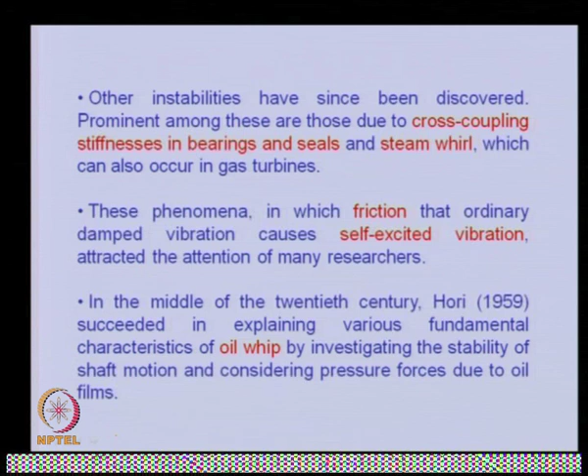The mechanism of vibrations due to steam whirl in turbines was explained by Thomas in 1958, and that in compressors was explained by Alford in 1965.

The vibration of a hollow rotor containing fluid is a relatively new phenomenon of flow induced vibration. Instability due to liquids partially filling the interior cavity of rotors was demonstrated by Kollmann in 1962, and in 1967 Ehrich reported that fluid trapped in an engine shaft introduced an asynchronous vibration and also changed the shape of resonance curves.

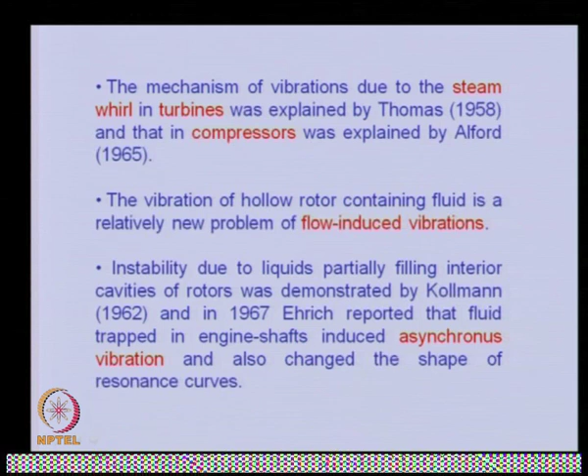Kuipers in 1964 and Wolf in 1968 independently succeeded in explaining the appearance of an unstable speed range in a post critical region of a rotor system containing inviscid fluid.

In the 1980s, the rotor dynamics effects of seals in fluid handling machines received a great deal of attention. Rotor destabilization due to seals was predicted and demonstrated in an operational compressor by Jenny in 1980.

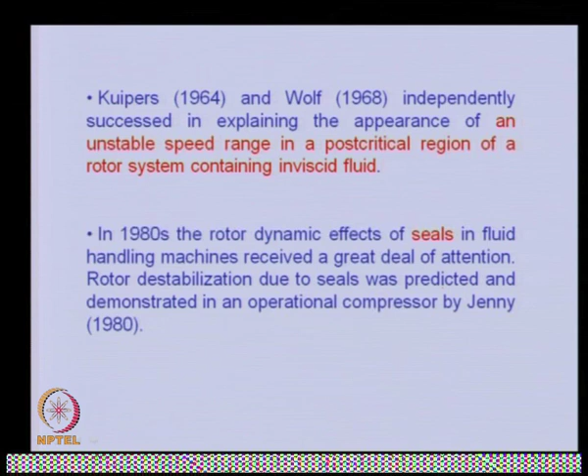As rotors became lighter and rotational speeds higher, the occurrence of nonlinear resonance such as subharmonics of half x, one-third x, etc., became a serious problem.

Yamamoto in 1955 and 1957 studied various kinds of nonlinear resonances after he reported on subharmonic resonance due to ball bearings in 1955. He also investigated combination resonances.

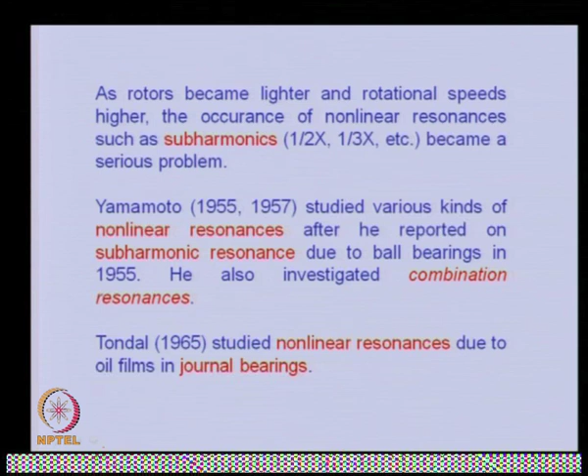Tondal in 1965 studied nonlinear resonances due to oil films in journal bearings. Ehrich in 1966 reported subharmonic resonances observed in an aircraft gas turbine due to strong nonlinearity produced by the radial clearance of squeeze film dampers.

These squeeze film dampers are identical to general bearings. The only difference is that in a squeeze film damper, the stiffness property which a general bearing gives to the rotor is not there; only the damping is produced to the rotor.

Then Ehrich in 1988 and 1992 reported the occurrence of various types of subharmonic resonances up to very high order, and chaotic vibrations in practical engines.

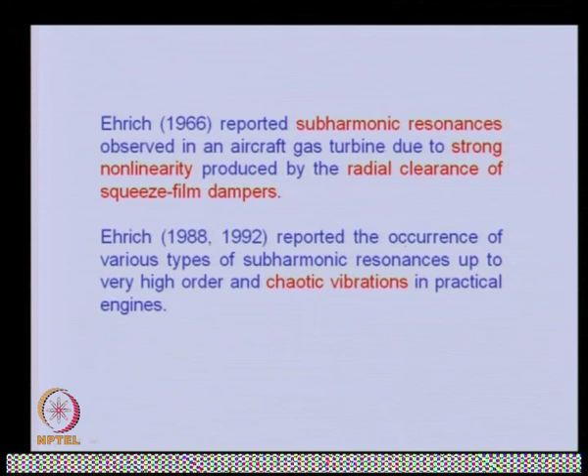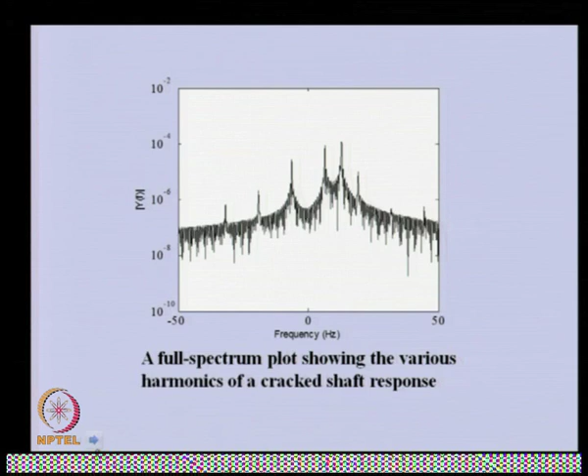The non-stationary phenomena during passage through critical speeds have been studied since Lewis in 1932 reported his investigation on the Jeffcott rotor.

Non-stationary phenomena that occur are of two types: one in a process with constant acceleration, and another with variable acceleration, in which we have limited driving torque. The theoretical analysis of such transitional problems is far more difficult than stationary oscillations. Many researchers have adopted numerical integration.

When considering transient rotor analysis, you must have observed that to avoid the critical speeds, generally the rotors are given very high acceleration so that they can cross the critical speed quickly and go to the supercritical region.

During acceleration, a problem may arise depending on the driving motor's power. If the drive has sufficient power, there will not be any problem achieving whatever acceleration we want. But if the drive has less power, the required acceleration will not be achieved, and you will have the problem that variable acceleration may take place.

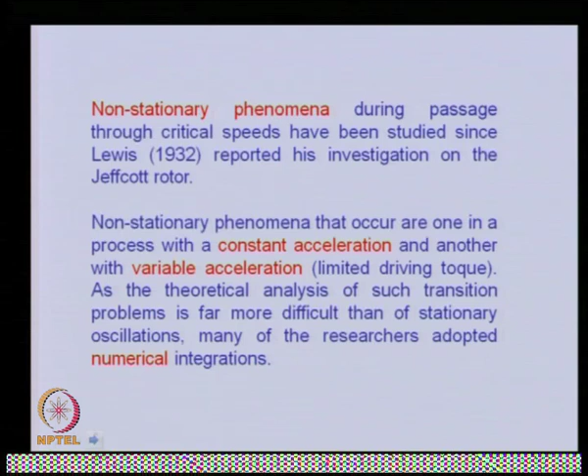Natanzon in 1952 studied shaft vibration at critical speed. Grobov in 1953 and 55 investigated in general form the shaft vibrations resulting from varying rotational speeds. The development of asymptotic method, that is analytical method, by Mitropolsky in 1965 considerably boosted the research on this subject.

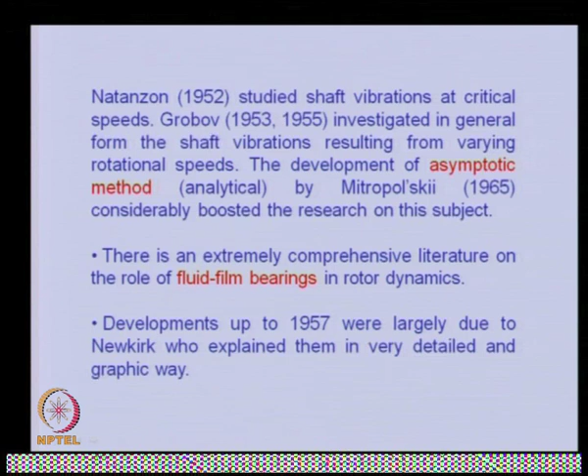There is an extremely comprehensive literature on the role of fluid film bearing in rotor dynamics. Development up to 1957 were largely due to Newkirk, who explained them in a very detailed and graphical way. Then beginning in the early 1960s, most attention focused on hydrodynamic bearings.

This was largely stimulated by Lund and Sternlicht and the Lund's work in 1962 and 64. Gunter's work in 1966 related to rotor dynamic stability problems, combined with Ruhl and Booker's 1972 and Lund's 1974 methods for calculating damped critical speed, stimulated a great deal of interest in rotor bearing stability problems.

Lund in 1987 gave an overview of fluid film bearing.

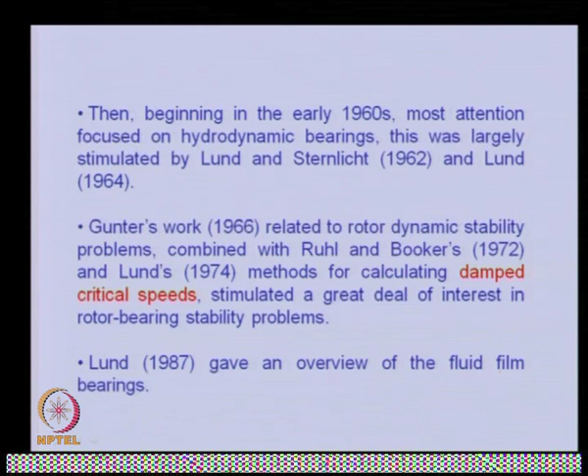In the mid 1970s, the rotor dynamic instability experiences with various high pressure compressors and high pressure fuel turbopumps of the space shuttle main engine focused a great deal of attention on the influence of fluid structure interaction forces, particularly forces due to liquid and gas seals, impellers and turbine.

Someya in 1989 and Tiwari in 2004 compiled extensive numerical and experimental results and literature of dynamic parameters of fluid film bearings respectively.

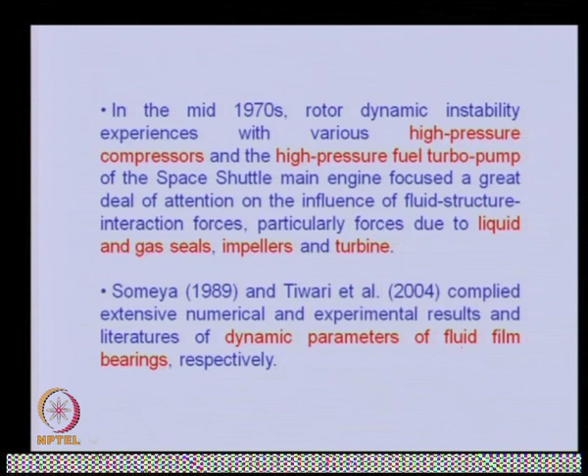Shaft seals have similar effect as fluid film bearings. They influence the critical speeds, can provide damping, or on the other hand cause instability. Some of the first investigations were carried out in 1965 by Lomakin. Since then, shaft seals have acquired a significant role in their effect on rotor dynamics.

As the extensive literature shows, in Childs' book in 1993 and a review paper by Tiwari in 2005.

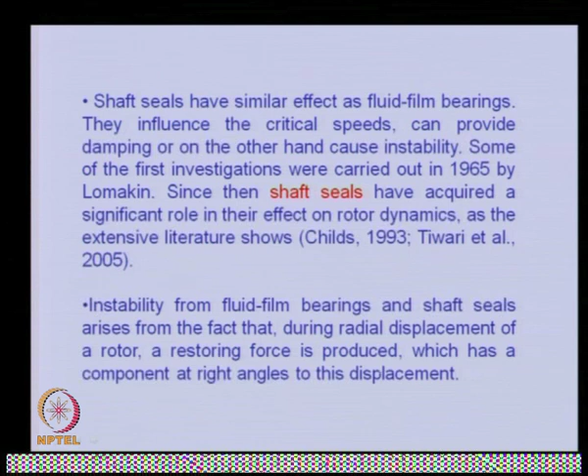Instability from fluid film bearings and shaft seals arises from the fact that during radial displacement of a rotor, a restoring force is produced which has a component at right angle to the displacement. Such a mechanism is possible for a rotor with blades as a result of variable leakage around the blade tips. The phenomena of instability was described in detail by Newkirk in 1924, whose interest was in turbomachinery.

At first, it was thought that the cause was internal friction due to shrink fits of the shaft, and the theory was developed to explain this, together with experimental verification by Newkirk in 1924 and Kimball in 1924 and 1925.

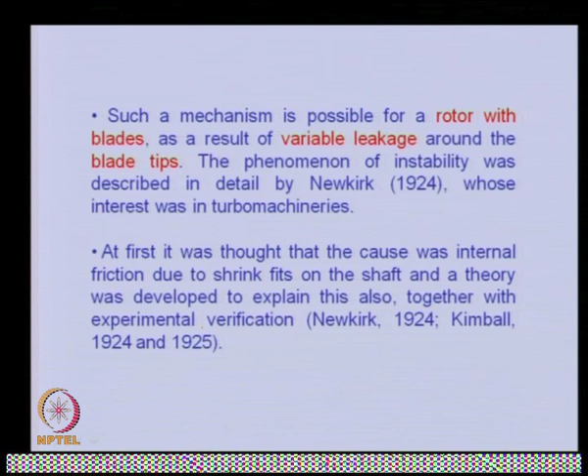Till now we have seen various literature reviews related to rotor dynamics phenomena and how people have attempted those phenomena. Now let us try to summarize whatever we have studied in a tabular form. So this is a summary of various rotor dynamics phenomena and their details.

Like whirling, that is related with unbalance, was first. This particular term was used by Rankine in 1869, and this was theoretical work which described the general motion of the rotor system.

Self-centering of rotor, this concept was introduced by De Laval in 1883. This is a theoretical experimental work which gives the unbalanced response of rotor.

Then the synchronous whirling was introduced by Föppl in 1895. That is also an unbalanced response with theoretical response.

Critical speed concept was introduced by Dunkerley in 1895. This is a resonance phenomena. Second critical speed was observed by Kerr in 1916 in his experimental setup.

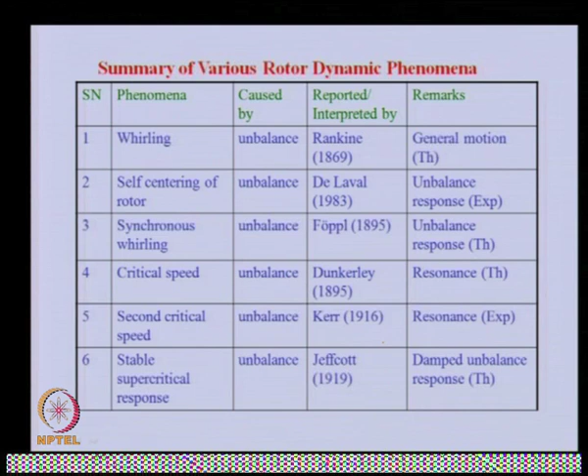Then secondary resonance due to gravity was explained by Stodola in 1924, instability due to shaft asymmetry by Prandtl in 1918, gyroscopic effect, that is rotor wobbling, was described in the Stodola's book in 1924.

Threshold speed, spin speed for instability due to internal damping, was described by Newkirk, Kimball and others. Threshold speed for instability for dissimilarity of bearing stiffness was described by Smith in 1933.

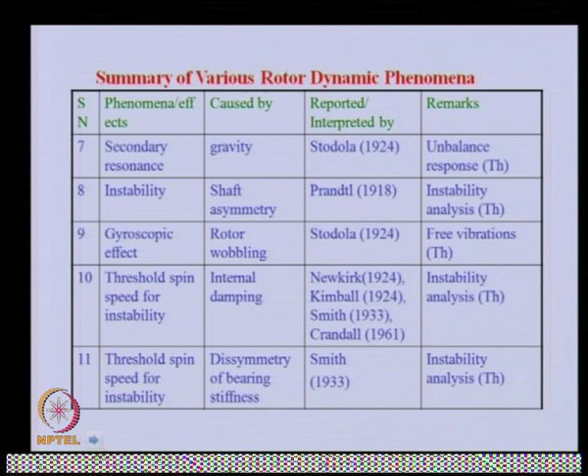Oil whip was observed by Newkirk and Taylor in 1925. Self-excited vibration due to contact was first reported by Becker. Oil whirl in hydrodynamic bearing was described in more detail by Hori in 1959. Steam whirl was reported in steam turbine by Thomas in 1958.

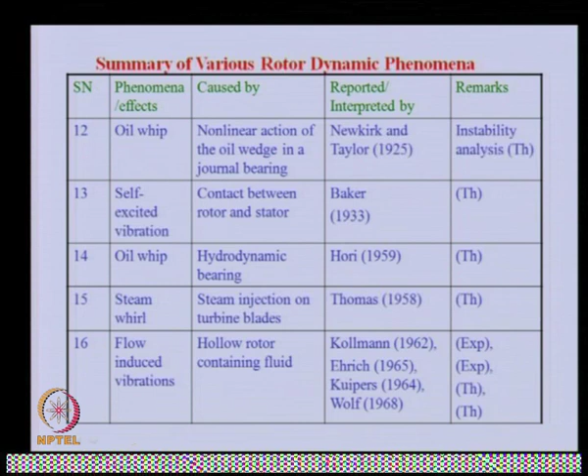Flow induced vibration in hollow rotor containing fluid was described by Kollmann and others, both theoretical and experimental works. Instability due to seals was reported by Jenny in 1980.

Subharmonics and combination resonances due to nonlinearity in the ball bearing was reported by Yamamoto in 1955 and 57. Nonlinear resonance due to oil film in journal bearings was described in great detail by Tondl in 1965. Subharmonic resonances due to squeeze film damper was reported by Ehrich in 1966.

Non-stationary response due to constant and variable acceleration of rotor speed was described by Lewis in 1932. Shaft vibrations at critical speed, that is varying spin speed, was dealt with by Natanzon in 1952.

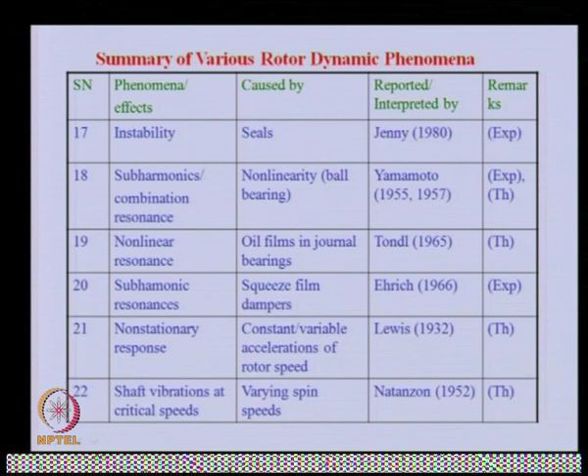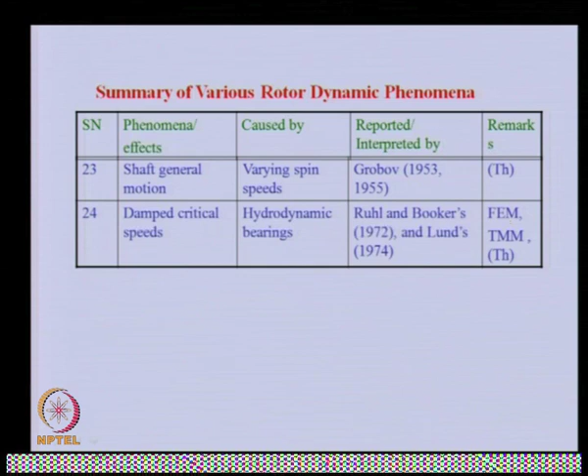Then the shaft general motion, that is for varying spin speed, was described by Grobov in 1953 and 55. This was theoretical work. The damped critical speed of hydrodynamic bearing was explained by Ruhl, Booker and Lund's work in 1974. They used FEM and TMM, that is finite element method and transfer matrix method respectively.

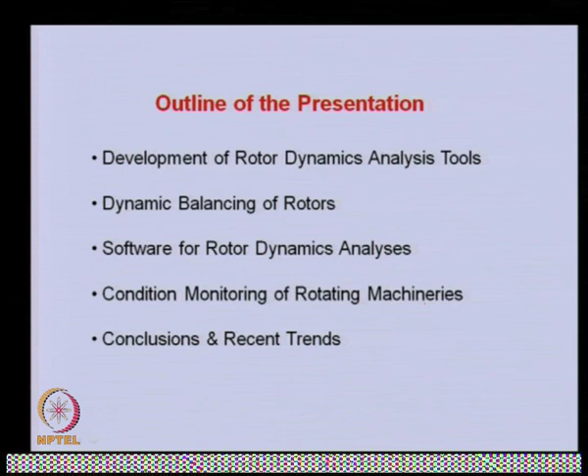Now we will begin with another phase of the presentation. This is the outline: development of rotor dynamics analysis tools, dynamic balancing of rotors and how that development took place, software for rotor dynamics analysis, condition monitoring of rotating machinery, and finally the conclusion and recent trends.

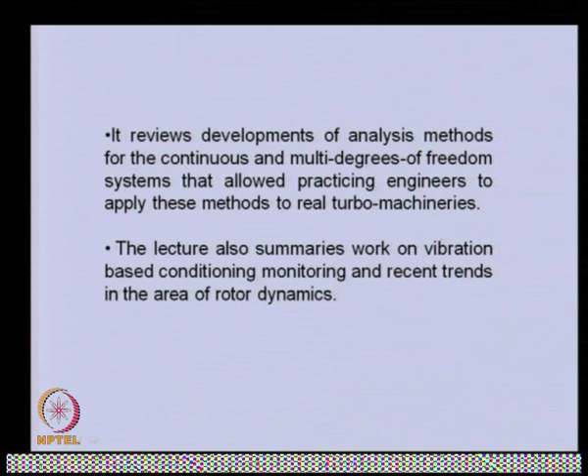We will review the development of analysis methods for continuous as well as multi-degree of freedom systems, which allowed practicing engineers to apply these methods to real turbo machinery. The lecture also summarizes work on vibration based condition monitoring and recent trends in rotor dynamics. So let us see the development of rotor dynamics analysis tools.

A remarkable amount of rotor dynamics can be explained by the dynamics of a single mass Jeffcott rotor model. There was confusion in the history of rotor dynamics, and Jeffcott clarified those confusions. Because of this, this particular rotor model is very popular and helpful in analyzing most simple rotor behavior.

This model was introduced in 1895 by Föppl, and was named after Jeffcott because in 1919 he explained the science of rotor dynamics in a graphical and illuminating way. Gradually, the Jeffcott rotor model in its many variations came closer to the practical needs of rotor dynamicists of the day, but not close enough.

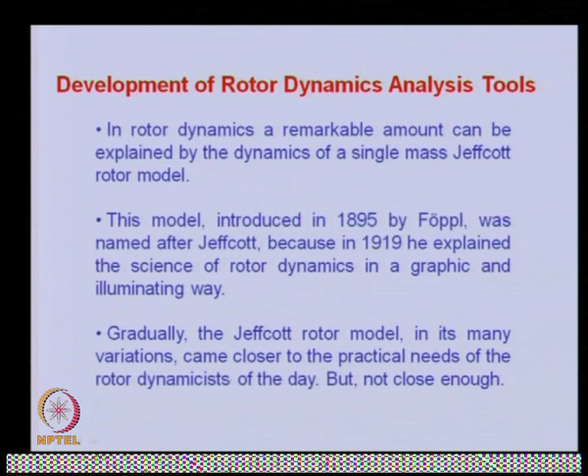Vibrations of rotors with continuously distributed mass were studied. In rotors, we can model them as discrete masses or as continuously distributed properties. In continuously distributed properties, both the mass and stiffness of the shaft vary along its length, but in a discrete system, lump masses are connected by massless springs.

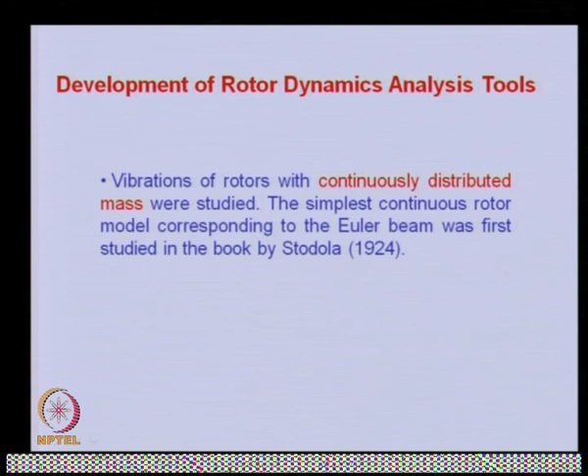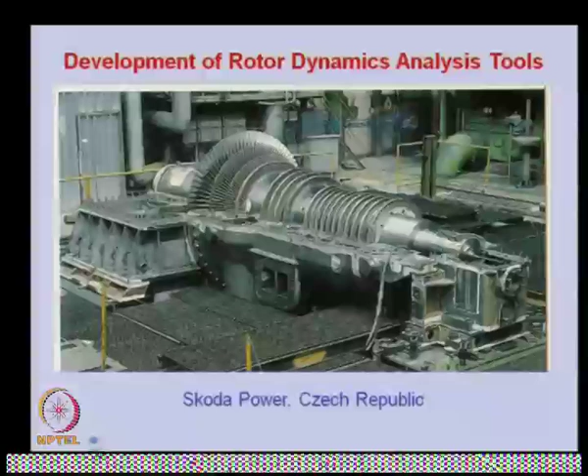The critical speed of shafts with distributed mass was also examined by Grammel in 1920 and 1929. In the 1950s and 1960s, Bishop and co-workers like Parkinson, Gladwell, along with Dimentberg and Tondl, reported a series of papers and books on unbalance response and balancing of continuous rotors.

Eshleman and Eubanks in 1969 derived more general equations of motion concerning the effects of rotary inertia, shear deformation, and gyroscopic moment, and investigated these effects. These are generally called higher order effects in rotor dynamics, and we will see, as we go deeper into the subject, how these phenomena affect the natural frequency and critical speed of the rotor system.

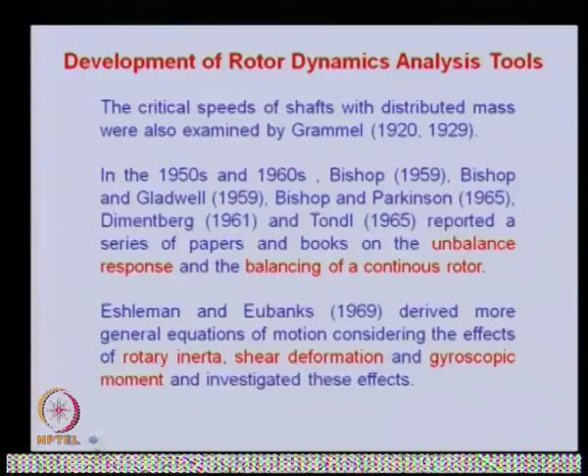Many practical rotors, especially those designed for aircraft gas turbines, were not suitable for a Jeffcott model. For one thing, the distinction between disk and shaft is blurred in a typical aircraft gas turbine. In practical design of rotating machinery, it is necessary to know accurately the natural frequencies, mode shapes, and forced responses to unbalance in a complex shape rotor system.

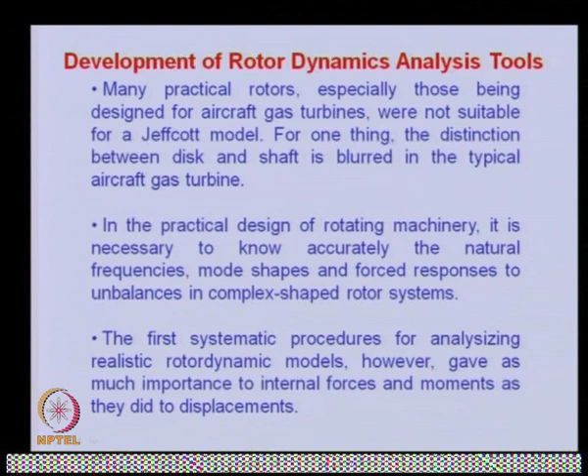The first systematic procedure for analyzing realistic rotor dynamics models gave as much importance to internal forces and moments as to displacements. The method of Holzer in 1921 for torsional vibration was of this type. Engineers could apply this method using only a slide rule. A more general modeling technique was needed.

This was supplied by Prohl in the late 1930s and published in 1945 for critical speed evaluation of turbine shafts. It is similar to the method published around the same time by Myklestad in 1944 for the natural frequencies of aircraft wings, but was developed independently. Of course, Prohl's method was designed for a rotating structure rather than a stationary one.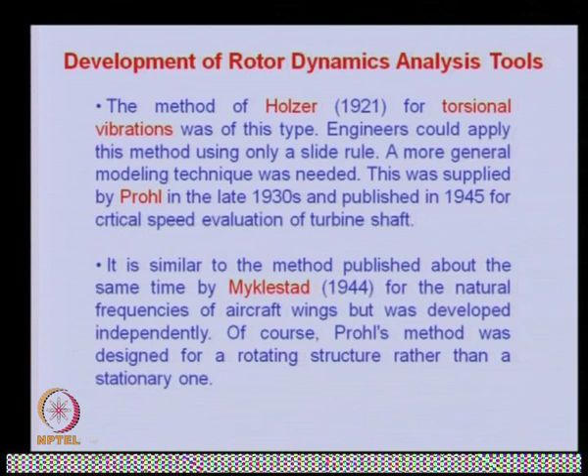Together, Prohl's and Myklestad's work led to a broader method now called the transfer matrix method, or TMM. This method is particularly useful for multi-rotor bearing systems and has developed rapidly since the 1960s through contributions of many researchers including Lund, Goodwin, Rao, and others. The TMM for rotors remains viable, and indeed still seems to be the method of choice for most industrial rotor dynamic analysis. Another representative technique used for this purpose is the finite element method.

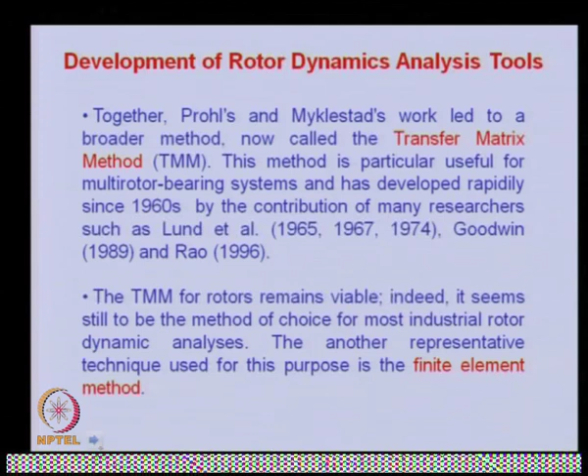Although most of the concepts used in finite element analysis were described by Courant in 1943, the real development of the finite element method as an engineering tool occurred a decade later with the introduction of digital computers and the formulation of structural analysis in matrix format by various researchers, then used in various technological fields. The name finite element method first appeared in the title of a paper by Clough in 1960.

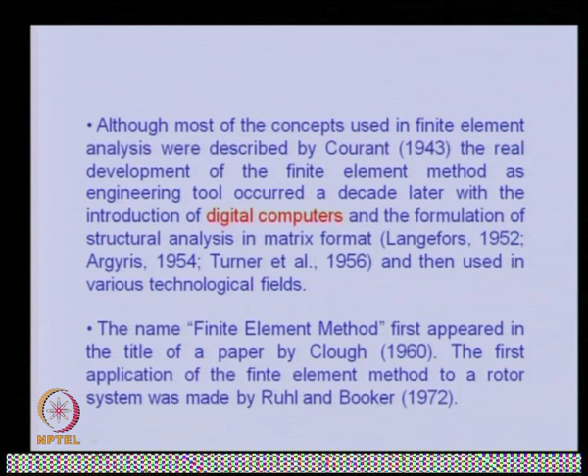The first application of the finite element method to the rotor was made by Ruhl and Booker in 1972. Then Nelson and McVaugh in 1976 generalized it by considering rotary inertia, gyroscopic moment and axial force. It was soon recognized that the large number of nodes necessary to provide accurate stress distribution created dynamic systems too large for economical calculation in three-dimensional solid models of such rotors.

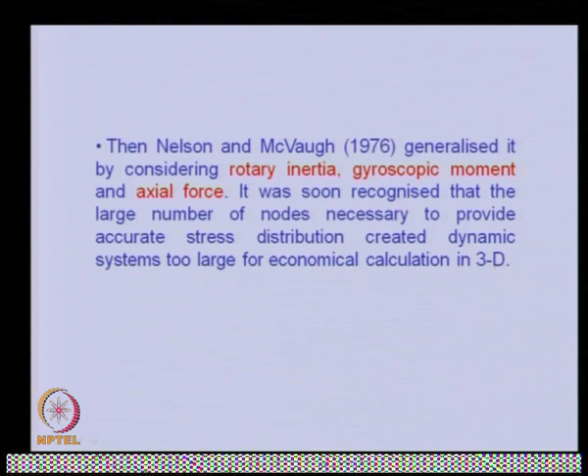Now we will see how people in industry were balancing the rotor, and how the very sophisticated method of balancing of such rotors based on vibration took place in history.

The most important and fundamental procedure to reduce unfavorable vibration is to eliminate geometric imbalance in the rotor. The balancing procedure for the rigid rotor was established relatively early. A practical balancing machine based on this technique was invented in 1907. The arrival of high speed rotating machinery made it necessary to develop a balancing technique for flexible rotors.

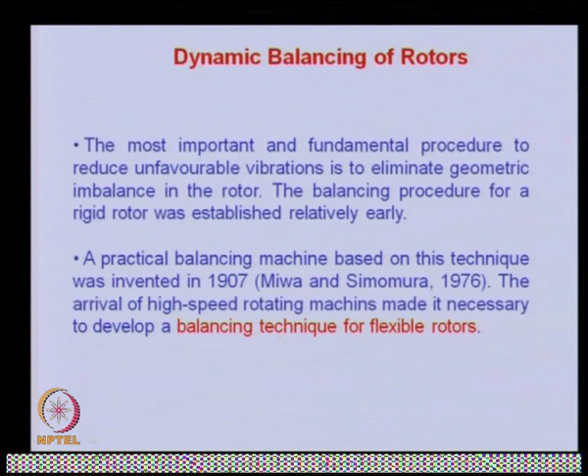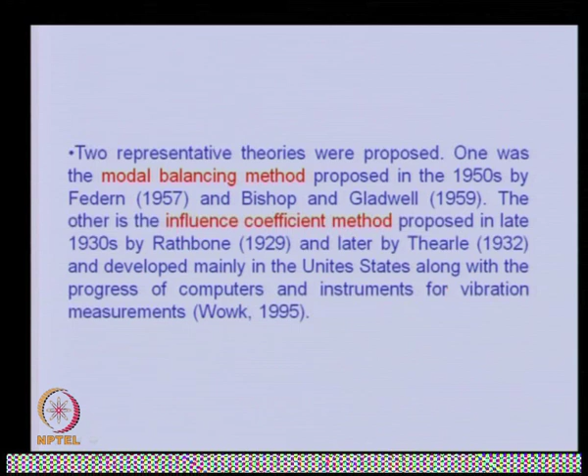Two representative theories were proposed. One was the modal balancing method, proposed in the 1950s by Federn, Bishop and Gladwell. The other is the influence coefficient method, proposed in the late 1930s by Rathbone and later by Thearle in 1932, developed mainly in the United States along with the progress of computers and instruments for vibration measurement.

This is the basic concept of rotor unbalance in a short rotor. You can see the first is the perfectly balanced rotor. The geometrical center and center of gravity are in line with the center axis of rotation of the shaft, as shown in the first figure.

In the second figure, there is a static unbalance, meaning there is a radial offset of the rotor from its center axis of rotation. Because of this, there is an unbalanced force.

The third case is a short rotor tilted by some amount, and because of this there is a couple which acts. The magnitude of this couple can be given in terms of the angle of tilt of the rotor, omega being the spin speed, IP the polar mass moment of inertia, and ID the diametral mass moment of inertia.

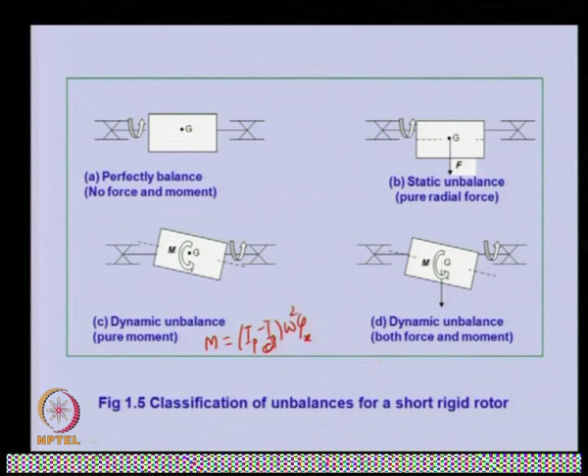The fourth case is the combination of moment and force, due not only to tilting of the rotor but also the radial shift of the rotor. So this produces both force and moment. You can see that case B requires a single plane to balance, but cases C and D require two planes to balance.

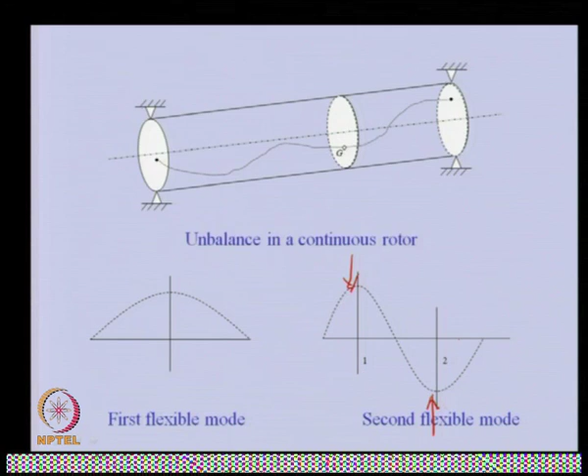So we have a half sine wave, and we can balance this with a single plane at mid span. But when operating in the second mode, it's a full sine wave, and we require two planes to balance, applying force in one direction and one in the other, so that the displacement of the rotor can be minimized. Similarly, with more modes, many more planes will be required to balance the rotor.

Now we will see some of the tools, because as methods were being developed to analyze rotors, simultaneous development of computers was taking place. People were developing indigenous software for analyzing rotors, and these indigenous softwares gradually became commercial ones. Let us see them in the subsequent slides.

World War II can be considered the demarcation between the early stage of rotor dynamics and what might be called modern rotor dynamics. This was the consequence of two factors. First, there was a growing awareness of the contribution of rotor dynamicists from non-English speaking countries like Dimentberg in Russia, Tondl in Czechoslovakia, Kramer in Germany, Yamamoto in Japan, among many others.

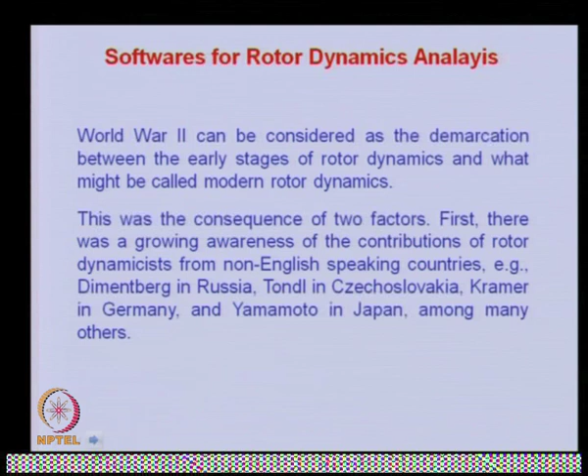Clearly, after World War II, rotor dynamic analysis had become an international endeavor, a fact recognized by the founding of the rotor dynamics committee of the International Federation for the Theory of Machines and Mechanisms, called IFToMM. Beginning in 1982, international conferences have been organized by this committee in Rome, Tokyo, Lyon, Chicago, Darmstadt, Sydney and Vienna.

Second, there was a revolution in solution capability, a transition from somewhat simplified models to almost actual geometry. In the 1960s, there was a coalescence of various numerical methods applied to structural dynamics, and the capacity of digital computers fostered the development of a series of general purpose computer codes in this particular field.

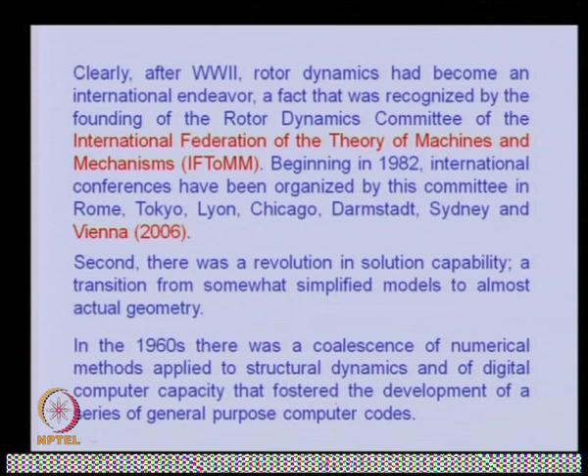The initial application of these codes to rotor dynamics was based on the transfer matrix method, but in the 1970s another underlying algorithm, the FEM, became available for the solution of prevailing beam based models. Now, beginning in the 21st century, rotor dynamics combines FEM and solid modeling techniques to generate simulations that accommodate the coupled behavior of flexible disk, flexible shaft and flexible support structures into a single massive multidimensional model.

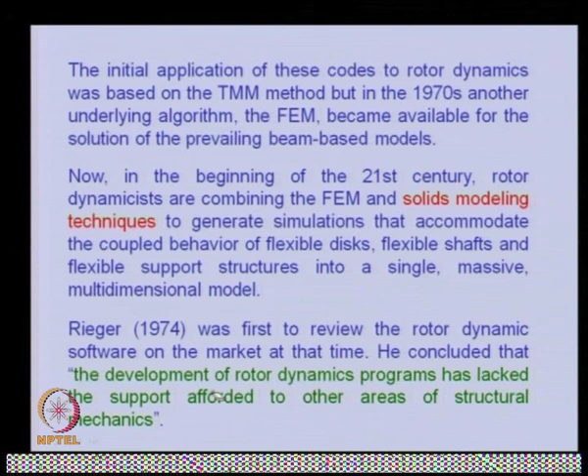Rieger in 1974 was the first to review the rotor dynamics softwares on the market. At that time, he concluded that the development of rotor dynamics programs has lacked the support afforded to other areas of structural mechanics.

Crandall in 1992 gave an overview of the rotor dynamics computer codes like ANSYS and other softwares available in the market. The classical Jeffcott rotor with 4 degrees of freedom was used to illustrate free, forced and self-excited vibration problems for rotor dynamic systems.

He also concluded that with regard to quality and quantity of software, the specialized area of rotor dynamics still lags behind the broader field of non-rotating structural dynamics. He gave two main reasons for this: the rotor dynamics market is small, and the technical problems are more difficult.

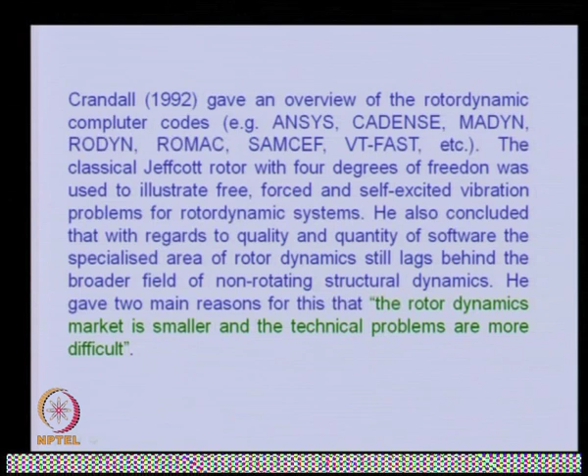Now, I will review a very important aspect of such rotating machinery, that is condition monitoring. Whatever the theory and development of analysis, these rotors or rotating machineries are well developed and various rotating machineries are operating in the industry, but during operation frequent failures are occurring, and because of that these condition monitoring techniques are getting more popular, so that both the money and the manpower can be saved.

So, in the 1960s, cracks were found in rotors of some steam turbines. To prevent serious accidents and to develop a vibration diagnostics system detecting cracks, research on vibrations of crack shaft began.

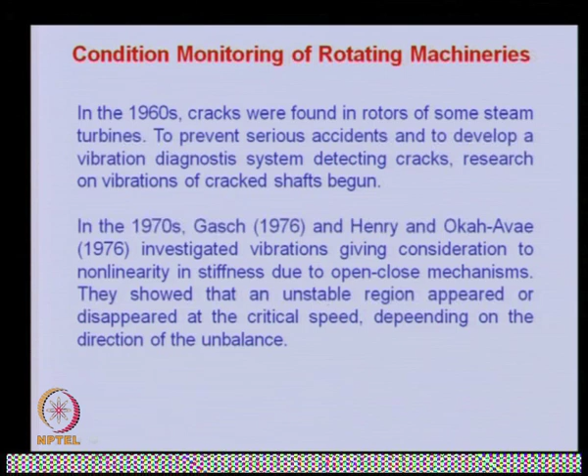In the 1970s, Gasch in 1976, Henry and Okah-Avae investigated vibration giving consideration to the nonlinearity in stiffness due to open-closed mechanisms. They showed that an unstable region appeared or disappeared at the critical speed depending upon the direction of the unbalance.

Another area in which a lot of development took place is the assessment of turbomachinery condition monitoring and failure prognosis technology.

In this particular condition monitoring, there are different levels of condition monitoring possible. First is the detection of the faults. Second is the diagnosis of this, meaning people try to find out the severity of the fault. Then the next level, after finding the severity, is whether we can quantify the life of the machine with that fault.

That means whether we can find out the remaining life of the machine, so that we can either operate it for a few more months or hours, and plan maintenance accordingly, or address an urgency. There are different levels of condition monitoring we can do. First is detection of the fault, where we detect it; second is localizing the fault, where we try to find out where it is in the machinery. Third is quantifying the fault, meaning how much severity it has. The fourth stage is finding out how much more time we can operate the machine with that particular fault, that is, the useful remaining life of the machine, so that we can plan maintenance accordingly.

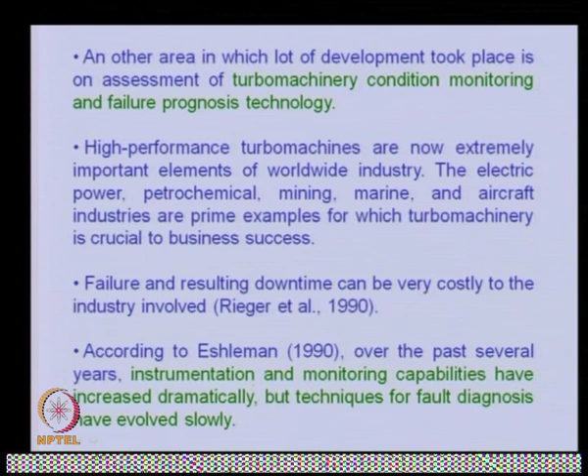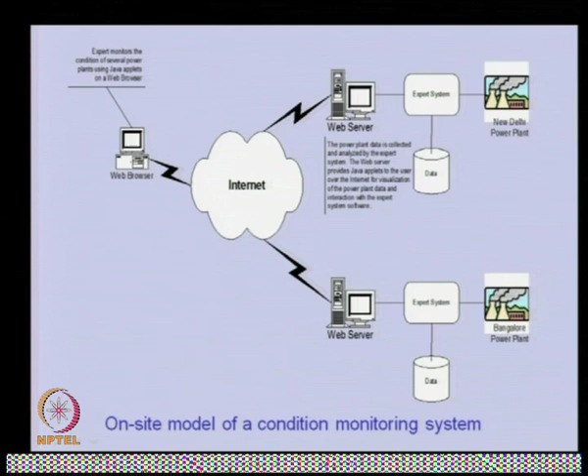The tools are therefore still more advanced than the techniques, and there are three technical areas that must be addressed for effective fault diagnosis using vibrations: condition and fault mechanism, modification of signal transmission path, and signal analysis. Edward in 1998 provided a broad review of the state of the art in fault diagnosis techniques with particular regard to rotating machinery.

A detailed review of the subject of fault diagnosis in rotating machinery was then presented. Special treatment was given to the area of mass unbalance, bowed shaft, and cracked shaft, these being amongst the most common rotor dynamics faults.

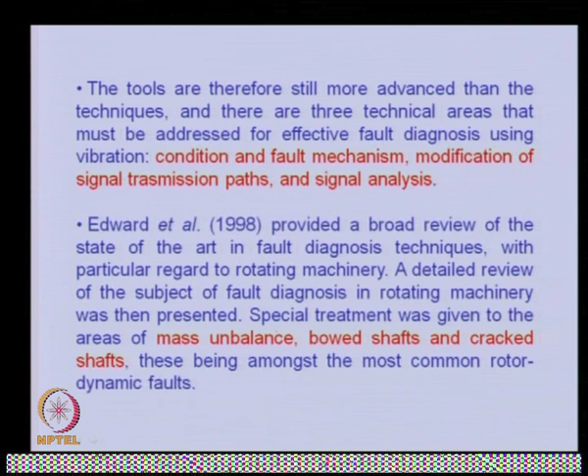Vibration response measurement yields a great deal of information concerning any fault within rotating machinery, and many methods utilize this technique, which are reviewed in this particular paper. Some other reviews provided a broad overview of development and progress in condition monitoring, diagnostics, and failure prognosis techniques applicable to high performance turbo machinery.

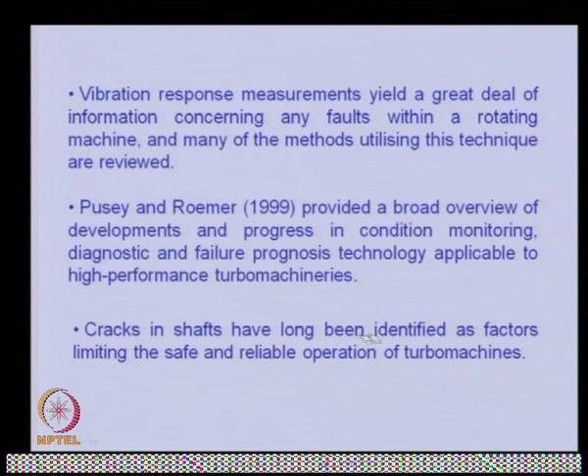Cracks in shafts have long been identified as a factor limiting the safe and reliable operation of turbo machinery. They can sometimes result in catastrophic failure of equipment, rotor bursts, and more often in costly process upsets, repairs, and premature scrapping and replacement of equipment.

In the past three decades, much research and many resources have gone into developing various online and offline diagnostic techniques to effectively detect cracks before they cause serious damage. Sabnavis in 2004 reviewed literature on cracked shaft detection and diagnosis published after 1990.

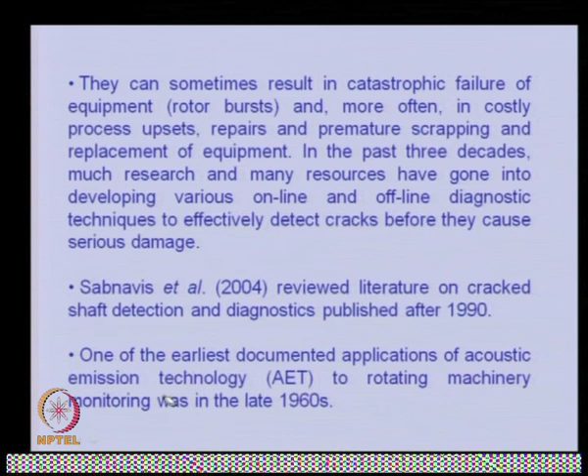One of the earliest documented applications of acoustic emission technology to rotating machinery monitoring was in the late 1960s. Since then, there has been an explosion in research and application based studies covering bearings, pumps, gearboxes, engines, and rotating structures.

Some other researchers, like Mba and Rao in 2006, presented a comprehensive and critical review of the application of acoustic emission technology to condition monitoring and diagnosis of rotating machinery.

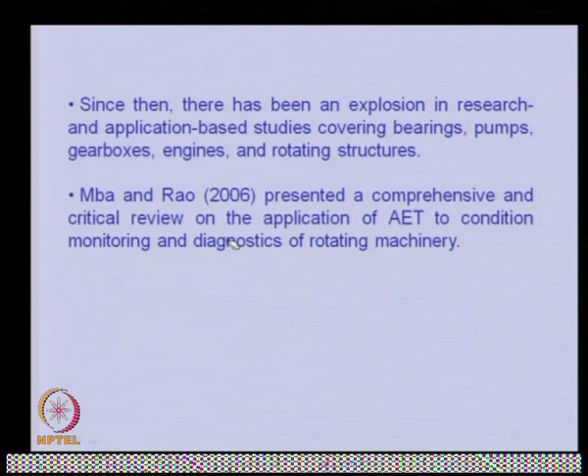So now we have already reviewed various analysis tools and condition monitoring tools. Now let us see the recent trends in this particular topic of rotor dynamics, so that new researchers can see the openings for research in the rotor dynamics field.

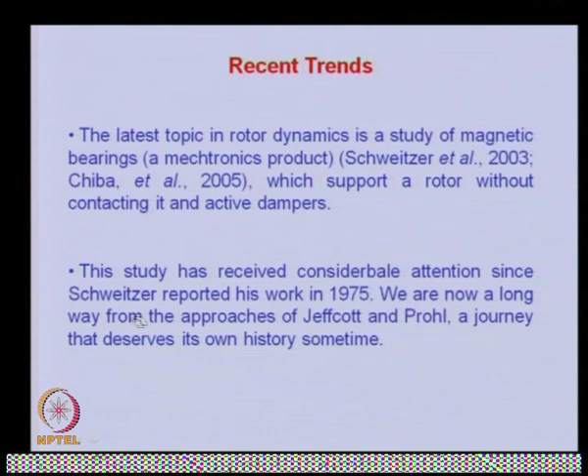So the latest topic in rotor dynamics is the study of magnetic bearings. It is a mechatronics product which supports a rotor without contacting it, and it gives an active damping effect. This study has received considerable attention since the work reported in 1975. We are now a long way from the approach of Jeffcott and Prohl, a journey that deserves its own history sometime.

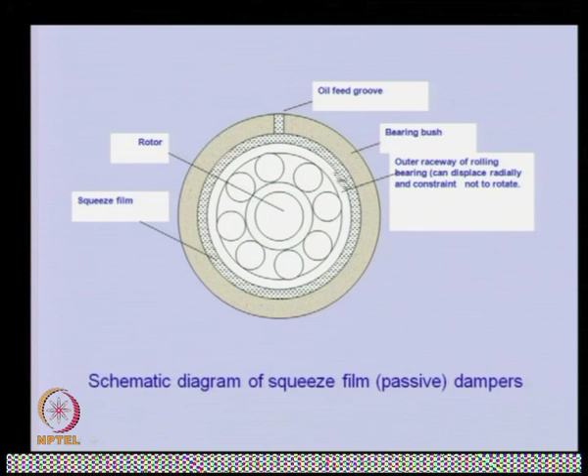As such, this outer ring is not rotating, only the inner ring is rotating, and during motion of this ring in the horizontal and vertical directions, the fluid between them gets squeezed, and that provides damping. This is because the outer ring is not rotating, so hydrodynamic action will not take place, only the squeezing action will take place, and this is generally used to dampen out resonance in the rotors to provide more damping in the system.

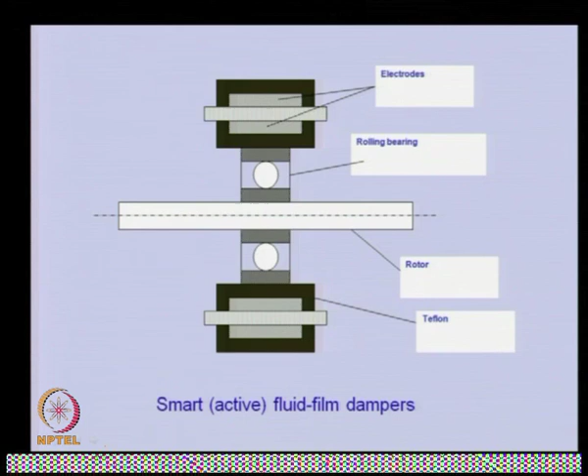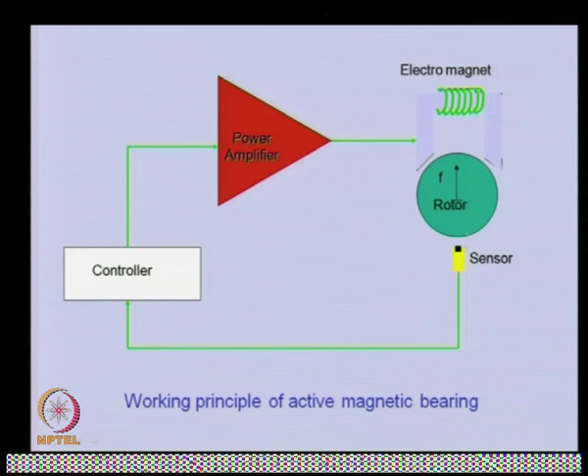This is one of the active research areas. We know the advantage of these bearings: because the rotor is floating on the air, there is no lubrication required, friction is less, there is no mechanical contact, and generally only high speed whose limit is the strength of the material matters. There is no problem with speed being constrained by bearing friction; only the rotor strength should be enough to have that much speed.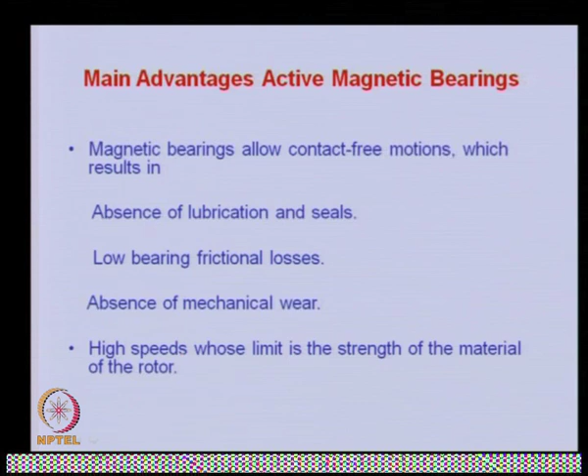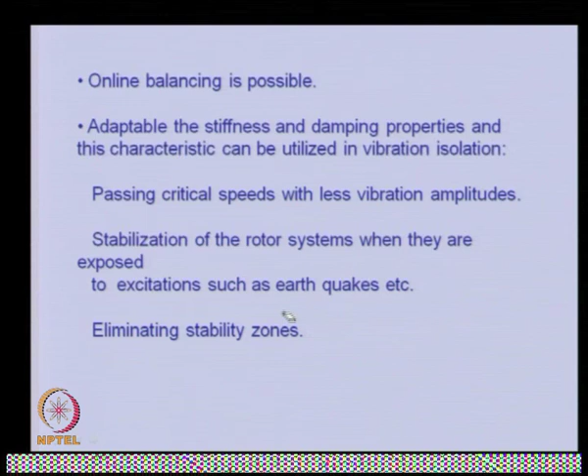With this magnetic bearing, not only can we suppress the resonance, we can also have online balancing, because we can change the stiffness and damping properties online. These are some other advantages we can have, like we can eliminate instability in the system also.

So, in the last two lectures we have seen the introduction to rotor dynamics. We have seen the history of rotor dynamics, even the state of the art in rotor dynamics. To brief these lectures, especially the recent trend is very important.

As I have already mentioned, one area where we should focus is on bearings, because bearings are still not modeled capable of predicting the actual behavior in bearings used in industry, and in most cases the bearing gives instability. Their properties are hard to find using available theoretical models, or if theoretical models are there, the difficulty is getting the proper properties which these models require. There is a difficulty in that. So, more research is required toward bearings.

Also, the foundation of such rotors is very important. They also play a role in the dynamics of the rotor. Apart from this, in bearings we have seen some kind of active bearings come up. They still require research so that they can be more reliable.

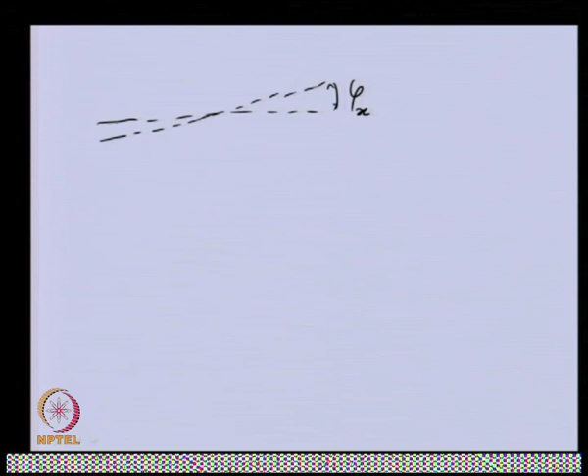Now, in the long rotor case, I will show another case. Let us say this is the original axis of the bearing, and the shaft axis is inclined by some angle, let us say this angle is phi x. So, the rotor is basically inclined like this. I have exaggerated the inclination just to show this particular inclination.

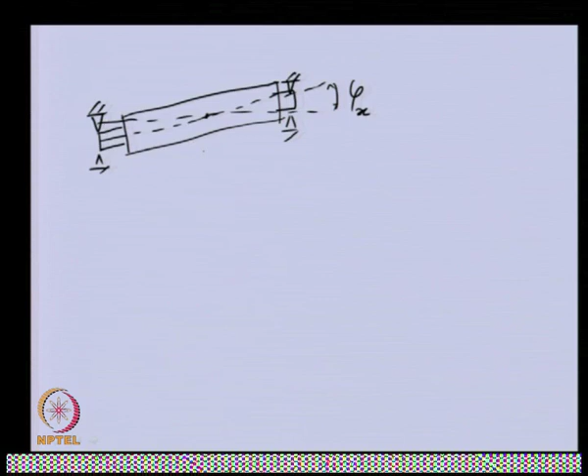In this, the center of gravity is on the bearing axis, so both geometrical center and center of gravity are at the same place. So, when this rotor is rotating with some RPM, there will not be any centrifugal force, because center of rotation and center of gravity are at the same location, but there will be a moment because of this inclination. That particular moment will be I p minus I d, omega square, and the angle of the rotor axis with respect to the bearing axis.

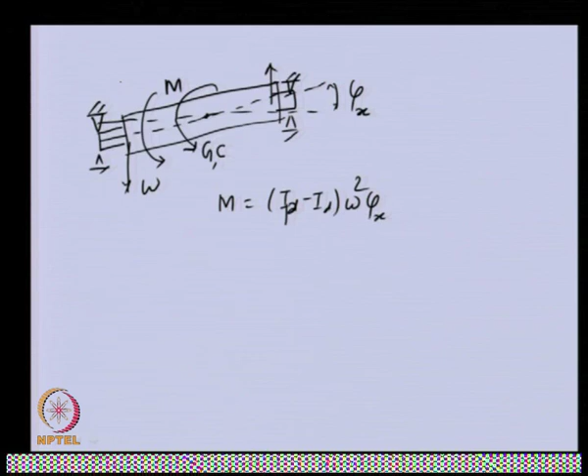For this case, because a moment is acting onto the rotor, we require two planes to balance it. Maybe you can choose one at this end, one at this end, and put some mass at a particular radius, and another mass at some other particular radius to balance this moment. Once we have this moment value, these can be obtained using moment balance in this particular plane.

Another case is when, let us say, this is the bearing axis and the rotor axis is not only inclined but also has some radial offset. In this case, the rotor will have a force which is m e omega square, and there will be a moment which will be the same as the previous one because of this tilt of the rotor.

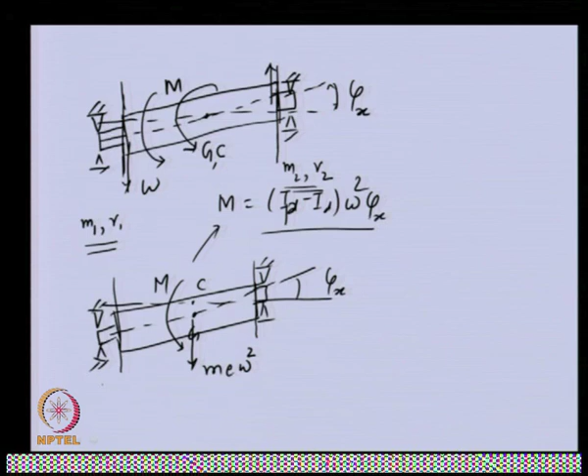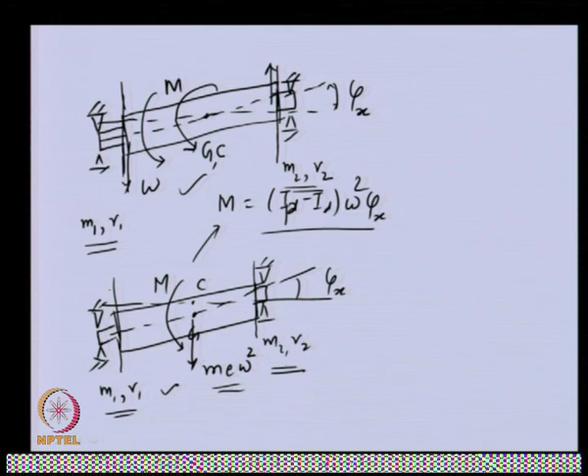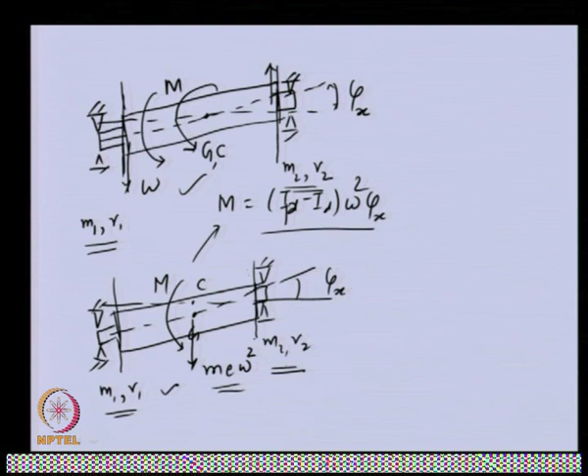In this case, we have both moment and force, and when we try to balance this rotor at these two locations, we will have two different masses at different radial positions, which can be used to balance both forces and moment. So, for both this case and the previous case, we require only two planes to balance the rotor, and this kind of balancing is called dynamic balancing, because the rotor is rigid. That is why we require only two planes to balance. In the subsequent lecture, we will try to derive these relations when we cover dynamic balancing of the rotor.